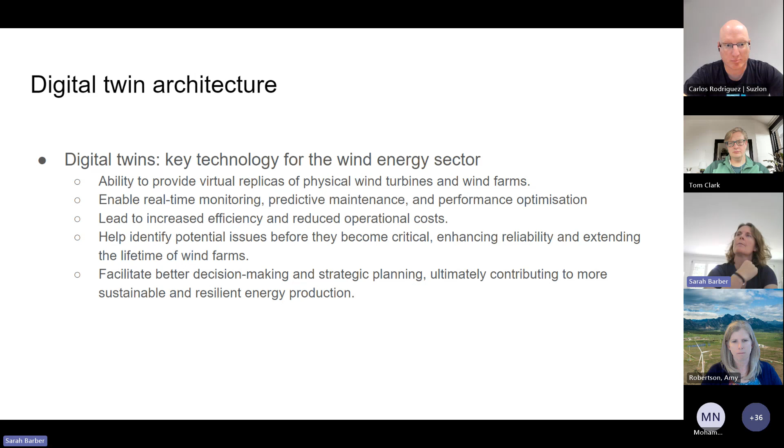But why architecture? The focus of today is about architecture. We think that architecture ensures better integration and interoperability when you want to scale up your digital twins, and that it allows for consistent data collection and analysis. If we define common architectures across the industry, we think this should enable different stakeholders to collaborate better, ultimately driving down costs. But we're going to get into that now with our speakers.

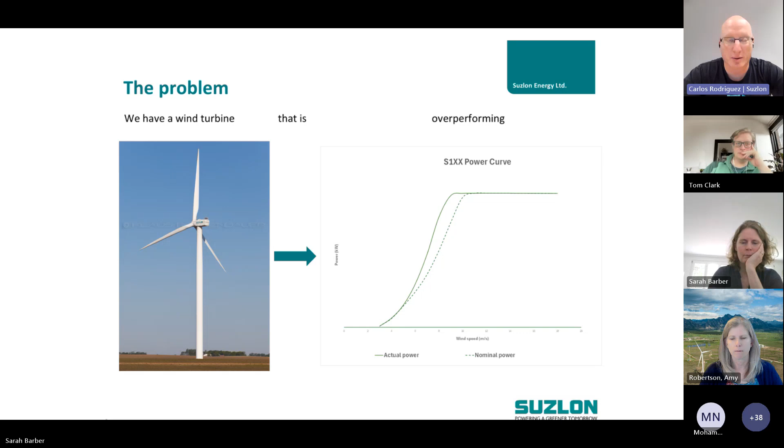Well, the problem we are trying to tackle is that sometimes we have a wind turbine that is overperforming, not behaving as expected. In the right diagram you can see the actual power measured, presented as a power curve in a continuous line, and then the nominal power, what it should be producing. So then the next slide.

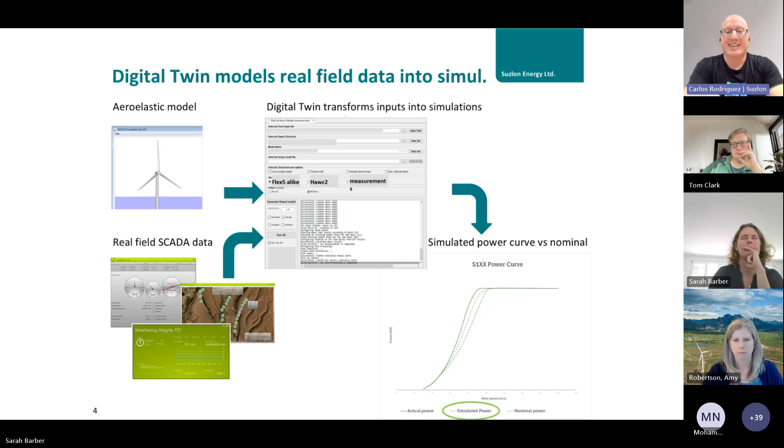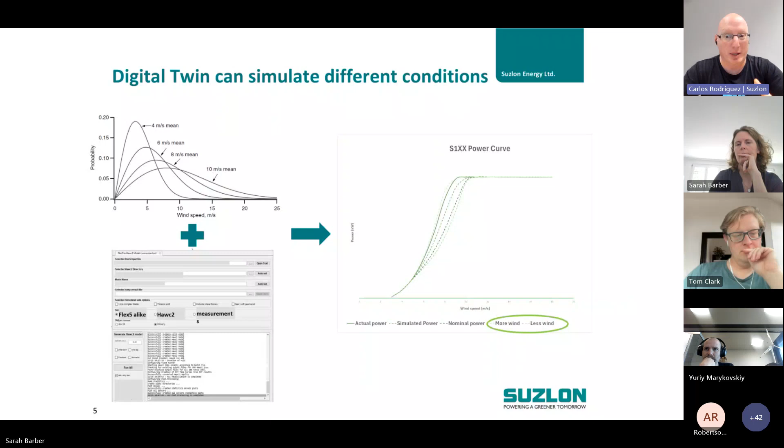So we combine those different wind distributions and feed them into the aforementioned GUI, digital twin, and we finally come up with two new power curves: one I call more wind, and the other less wind — more wind to the left and less wind to the right. Comparing all those power curves, all five: the actual measurement, the nominal power (what the turbine should be doing), the simulated power (our first attempt to harness that into something we can tweak with the computer), and then the more wind and less wind curves, meaning the likely wind distributions that could be happening at the site. Then we go to the next slide, which should be there.

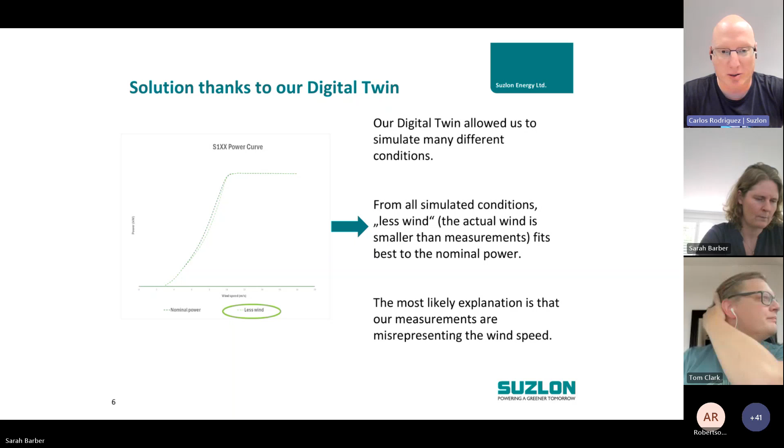So the power curve that better matches what is expected from the turbine, assuming the turbine hasn't got any damage or is relatively new, assuming we've also checked the controller parameters, and that all the other uncertainties are checked and the only one left is the wind — we can come to the conclusion that the most likely explanation for that overpower is that the wind conditions are misrepresented. We come to this conclusion because we have a reliable, realistic model, our digital twin, and we can feed it with whichever wind conditions, in this case for the presentation, but exactly the same thing can also be used to try, say, when we have uncertainties with the polars, like with the aerodynamic design.

We can also try different parameters. We have seen some uncertainties. Let's say we have some uncertainties with the structural modeling. We can also change different parameters there, feed them into the model, into the digital twin, and see which one reflects better reality or what is expected from the turbine, and so on.

We can pretty much, once you have framed your reality into the computer, do anything with it and try whatever you are looking for. And usually you come to a much better, much more informed conclusion, because right now all these discussions become very philosophical without really having real numbers, let's say.

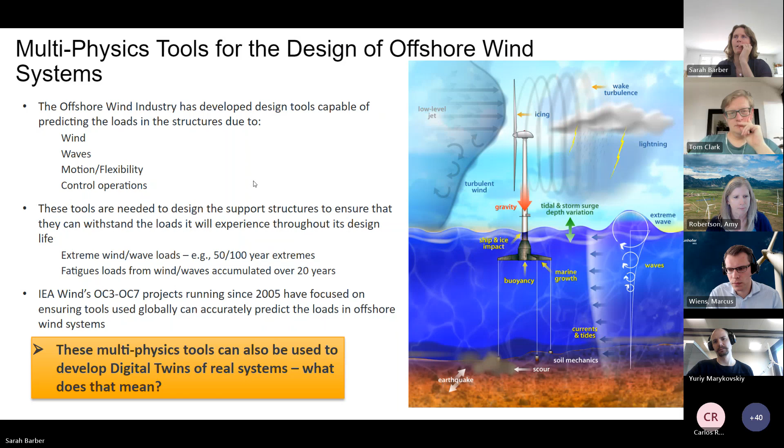So this is just an overview of what OpenFAST looks like. For those not familiar with some of these engineering level physical modeling tools, these are what we call mid-fidelity tools. They're not high fidelity CFD type tools where you can completely resolve the physics of the offshore wind system, but something that's simplified so that it can be run quickly. So the idea is that if you have numerical models that can run rather quickly, then there's a potential to have them integrated within the wind farm to actually help in making decisions for that wind farm.

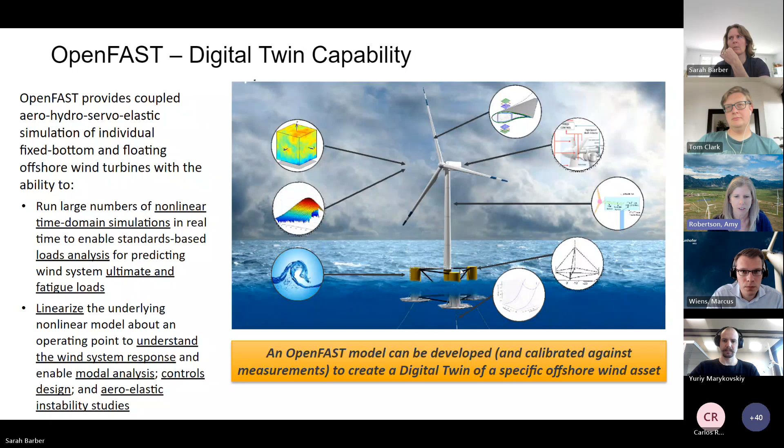But even these mid-fidelity tools are starting to get quite complex, so it's not so easy to run them so quickly anymore. So there's even the potential to look at more simplified models. Just showing here also that those modeling tools in OpenFAST do take in the full representation of the wind, the waves, and the structure itself.

So in terms of how do we use those OpenFAST-like tools for digital twin implementations, you can just use a model of a wind system within OpenFAST directly as a digital twin. Again, you can have that being an exact replication or as close of a replication as possible to a physical asset to help you make decisions. But to be able to do something more quickly, then you might want to look at something more simplified - maybe lower fidelity modeling tools, or use some of those mid-fidelity capabilities, such as through OpenFAST, in a more time-efficient manner.

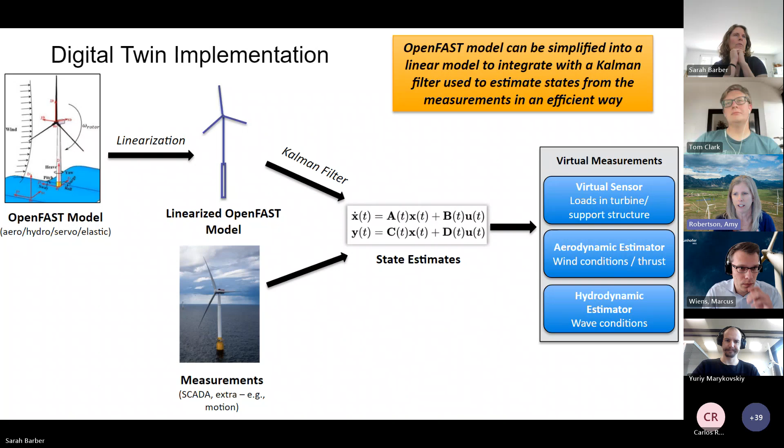So this slide is showing how we've adopted OpenFAST specifically for digital twin implementation by taking that OpenFAST model, doing a linearization of it, and then integrating that linearized model with measurements to get a representation of the system that you can use in a real-time way.

So the application where we've used this specifically is for the Stiesdal TetraSpar demonstration project. This is the 3.6 megawatt demonstration project that was done in the last few years. And what we're trying to do is take some small set of measurements from this wind system and use this digital twin as a virtual sensor.

So let's say you don't have the wind speed measurement, and I think we just had some SCADA data, which did not include the wind speed measurement. And we tried to take that limited set of information and say, can we understand what's going on throughout the wind system? So as you can see on the lower left there, we are trying to understand, can you predict what the wind speed is, the thrust, the tower base moment, and the tower middle moment based on this very limited set of information that most wind turbines typically have readily available. So can you use your digital twin as what we say a virtual sensor?

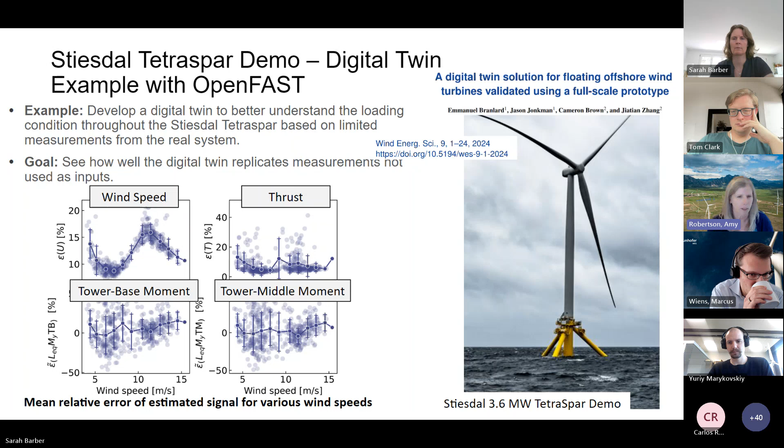And you can see in the results on the lower left there that this is showing what the relative error is in those predictions. So in this case, we actually had a fairly well outfitted system with a lot of measurements. So we pretended like we didn't have those so that we could then try to predict them and compare how well we were doing. So you can see that there's some level of error, but actually it was getting the trends quite well, but there's definitely area for improvement. Next slide.

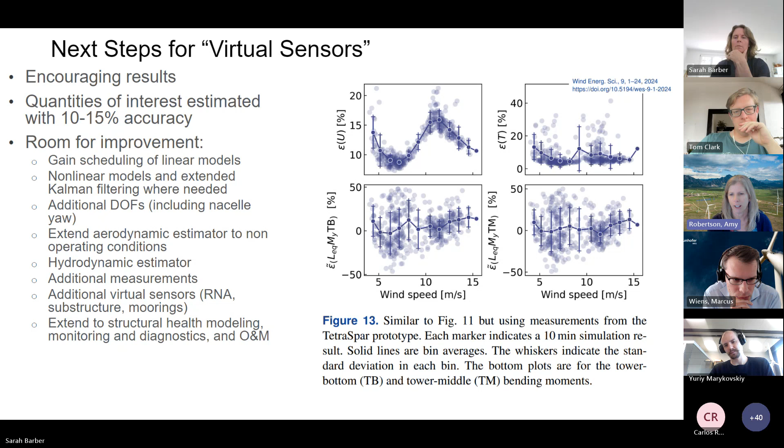So yeah, there's encouraging results in general. We had about a 10 to 15% inaccuracy in our results, but right now we've developed the capability so that you can predict certain types of sensors, and we'd like to expand that more to be able to look at things like the wave climate of the system, as well as additional degrees of freedom, like in the blades and things like that. So we really want to drive towards having this model be able to tell you what is going on throughout the system so that you can then make decisions based on that information. Next slide.

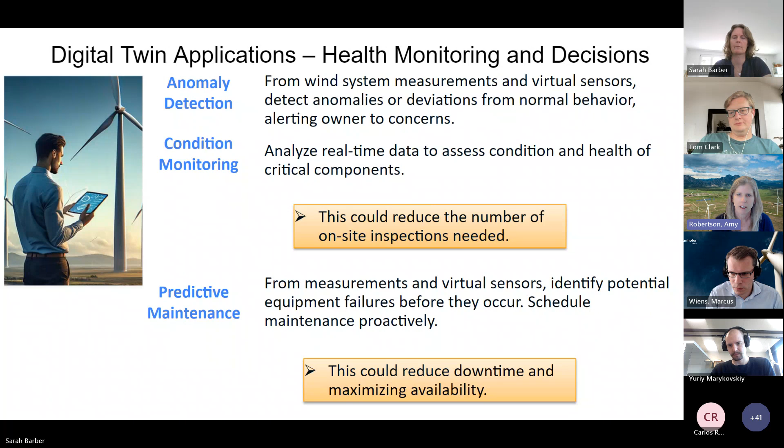So I know Sarah touched on this a little bit, but now that you have this representation of the system, what types of things can you do with it? So here we're just showing the type of information you can gain from that digital twin, but the applications that you can then use it for are things like anomaly detection, condition monitoring, predictive maintenance. So this is assessing what the health of the system is, what the status of the system is, and then making decisions for a predictive maintenance type scenario where you're able to understand how the system is accumulating damage. So you can make proactive maintenance decisions. Next slide.

And another application area is performance optimization. Again, if you have this information coming in and you have a model, you can start understanding how the system is performing, like we saw in that last presentation. But you can make decisions on things like the controls. How are you controlling your wind farm in terms of how much power you're getting out versus how much load accumulation you're seeing? This can be done at the farm level or at individual turbines. And you can actually look at ways through that digital twin to understand how you can improve the performance or lessen the loads within the wind farm itself.

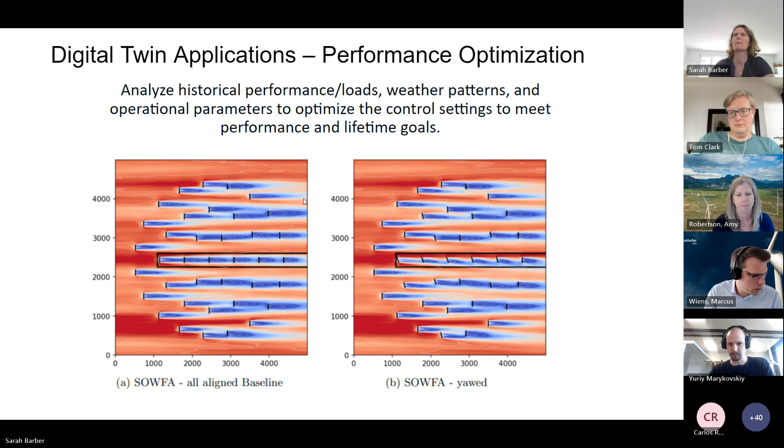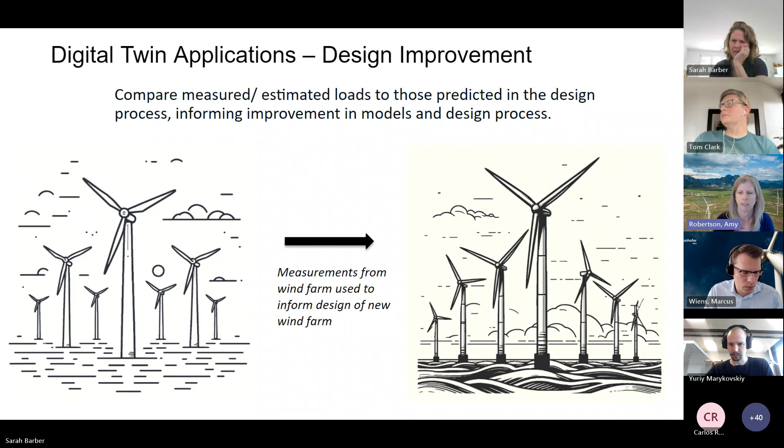Next slide. And then finally, this isn't a direct link, but as you have this model and you're seeing what the real world properties are, again, looking back at that last presentation, you can actually think about how you need to improve the physics in your models. And by doing this, you can understand how your models are being used to design these systems, and think about how you need to improve your models to better match the actual physical systems compared to what you originally predicted. So getting that feedback loop of assessing what your model thinks the system looks like, getting those measurements, and improving your models and design process to get to a better representation in the end.

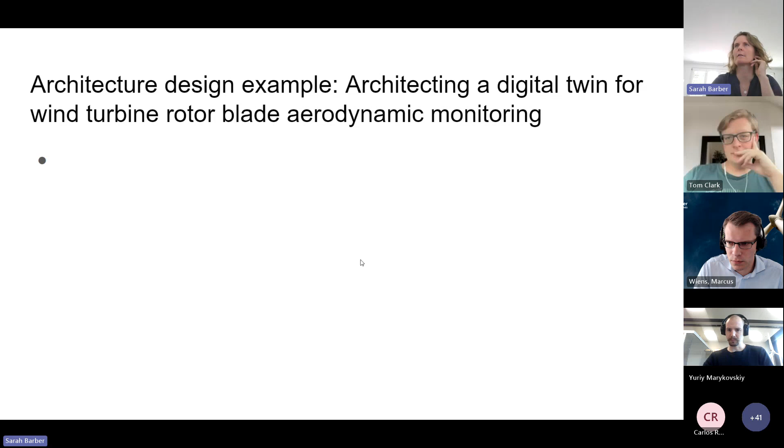So now we've seen two examples. Obviously, there's hundreds more examples, but we've just seen two interesting examples, I think, of digital twin applications. And now we're going to move on to the next topic. So we've now got two presenters who are talking about examples of architecting, so not necessarily focusing on the physics or the data or the models, but focusing on how these different components get stuck together and what needs to be thought about for that. So I'll pass on to you, Tom.

Thanks very much, Sarah. Next slide, please. So I'll be taking us through three steps. First of all, a little bit of a follow-on from how Sarah introduced the topic of digital twins, and expose you to some of my controversial opinions about what they actually are. Then I'm going to talk about what I call the accidental data lakehouse.

So we did this project called AeroSense, working with Sarah a couple of years ago now, to build a digital twin that allowed us to do rotor blade aerodynamic monitoring, and had some interesting experiences storing and managing data. And so I want to pick up on some lessons for how we did that and the successes that we had there.

Then I want to drill down a little bit more and pick up on what Amy's been talking about with a more detailed example of, okay, how do we actually integrate OpenFAST, for example, into a digital twin? Next slide, please, Sarah.

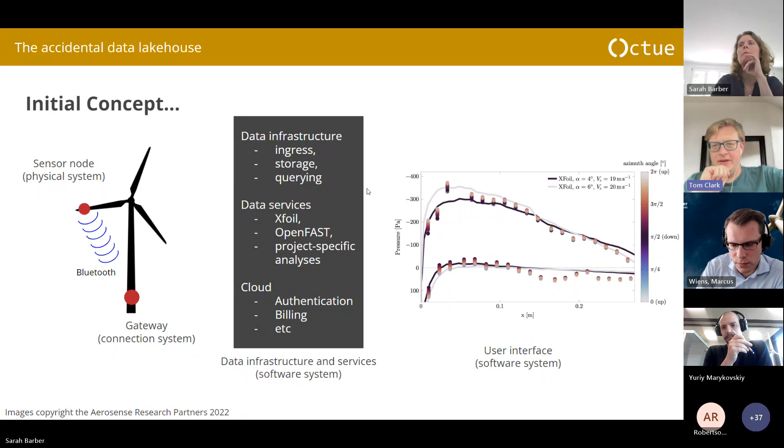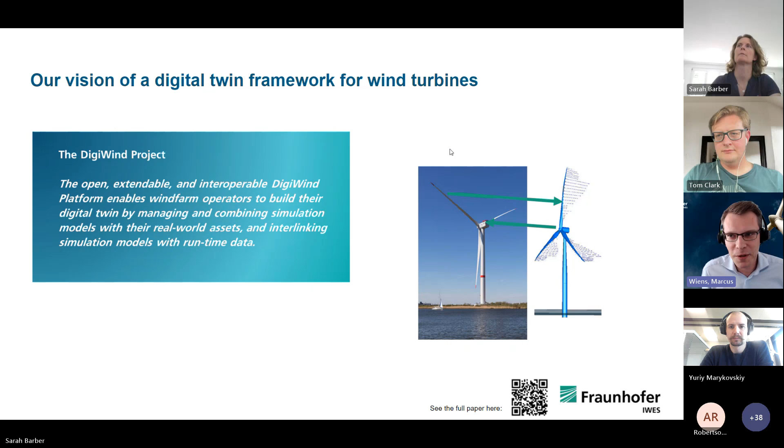So this is also what this picture on the right shows here. So you have a physical asset that is putting something into the digital space, and then you do something with that and hope that you can improve your physical system. That's basically the base of what we can maybe agree on when we talk about digital twins, that this is an essential part of it. And when we wanted to develop this, thanks, Sarah, we went through a requirements engineering process.

So we looked at use case diagrams: who are the stakeholders in operating a digital twin and what might they want to do? And we came up with basically a lot of simulation related stuff. So in the end you want to somehow manage your simulation models. You probably have different versions or parameterizations of them, from a lot of different tools maybe. So you want to be tool agnostic, and you also have to include some meta information about your models in order to use them in the end in your digital twin.

In our digital twin, we want to execute simulations. These are usually dynamic simulations which run over time and show you some transient behavior. And we also want to have a descriptive structure of these things so we can automate them and run multiple simulations with different parameterizations, for example, or connect multiple simulations in one big run. And you need to be able to assemble those simulations. You don't want to define everything by hand all the time. So is there a way of automating what you want to do?

And then in the end, the most important part was add functionality. So how can you make a framework that can be extended with additional components? And then you have to have a loose coupling between those components so you can construct them in the way you want and then connect them.

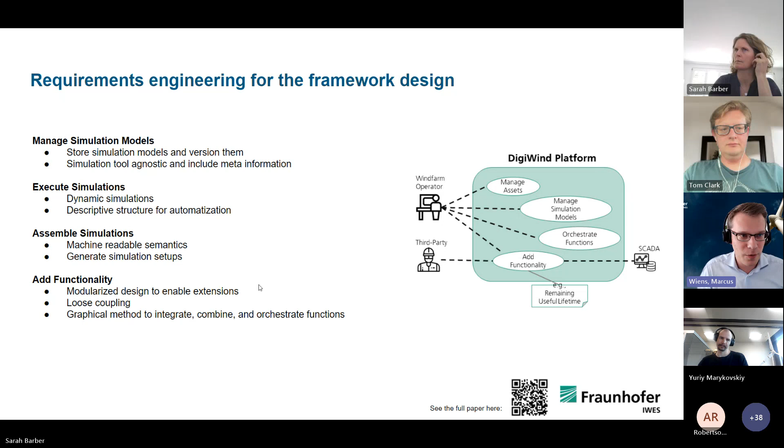And this led us to the last point there. We want to have a graphical representation as well to be able to integrate and combine different steps in our process and also run all of these things somehow.

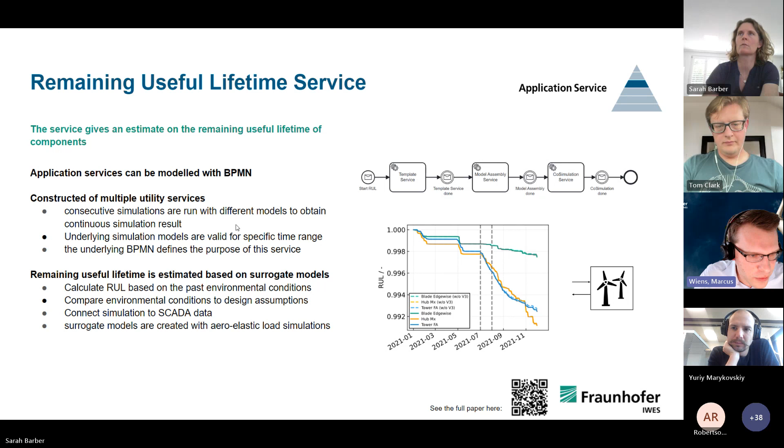They are constructed automatically, and then you run them all in a co-simulation. I'm not going to go into detail of all the utility services - these are explained in the paper, but these are always things that can do one specific task, and they should do that task really well. And if you have anything that can communicate via MQTT, because this is our communication layer in between everything, you can integrate the process here.

At the moment, we are wrapping everything in a Docker container, so our simulation runs in a Docker container. The templates used to define simulations are constructed there too. We have our model versioning also connected via that. And we're also using an ontology here to describe models and simulations, which helps us in the optimization, making it known to the computer how to connect models and how to replace models when working with different versions of them.

I already mentioned Docker, which is a container-based framework to set up all of these microservices. We have Zeebe, which is the workflow engine that runs these BPMN diagrams and coordinates the messages between all the single services - this is an extension we made there with MQTT. We obviously need a broker, which is Mosquitto for that. We have a hosting part for the ontology, which is Jena Fuseki. Currently, we have implemented all microservices in Python, but you can also implement it in any other language as long as you can send and receive messages with MQTT. We also have a file server in the system, so you can have storage for your data or models.